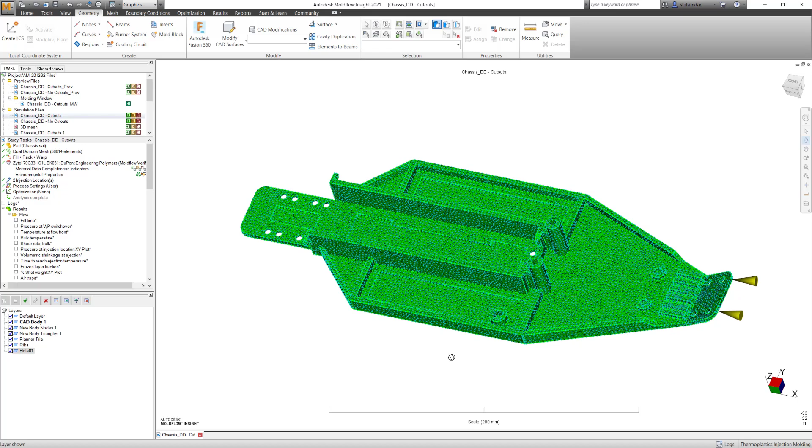In today's episode, I'm going to discuss improving the accuracy of your simulation results. I know there are a number of factors that contribute to increasing the accuracy of the results. A few are related to the CAD components and a few of them are related to the input data.

Now, what are the input data? It could be related to the processing parameters, it could be related to the mesh representation or how precisely you are representing the geometry to the solver, and another part is the material data input. Yes, you heard it correctly. Now, you ask me what material data input or what things can go wrong with the material data inputs. Well, we will discuss in a step-by-step manner or in a sequence.

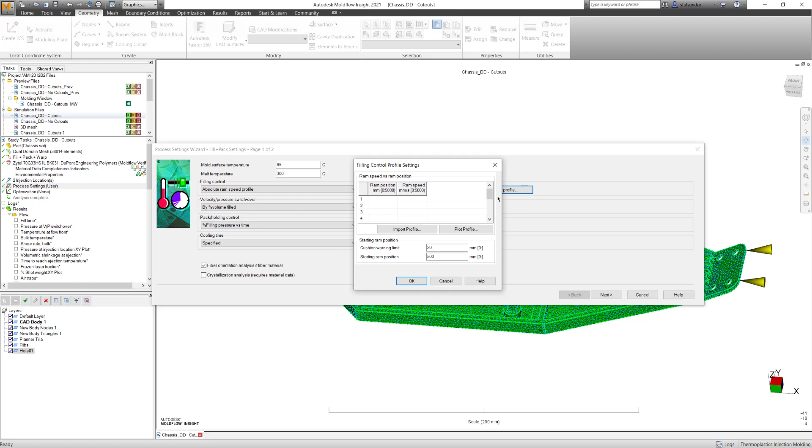First and foremost is the processing parameters. Moldflow does allow you to put in the processing parameters, for example in filling control. If you want to do correlations with your actual molding machines or take the data from the molding machines, you can fit in the data in terms of relative ram speed profile or absolute ram speed profile. That does take you closer to the actual reality.

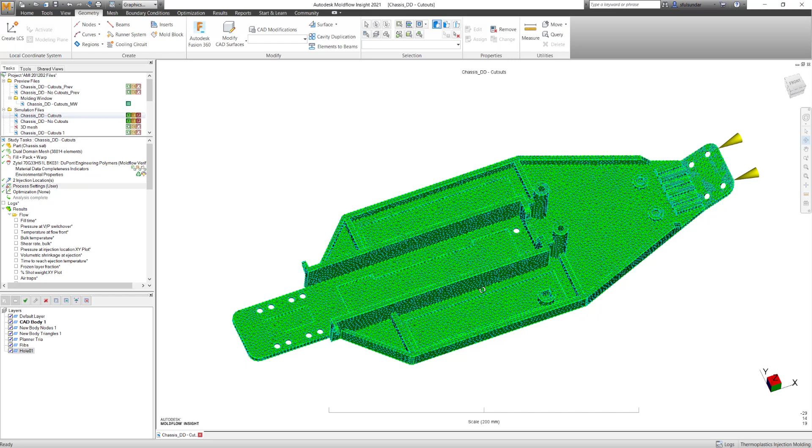Another input is related to how well we are representing the geometry to the solvers. Many times in the simulation or in the design house, the user is working on a little bit different geometry versus what has been cut into the actual tool. I have myself experienced some of these discrepancies between the two models. An example is related to the rib thicknesses. Maybe the rib thicknesses represented in the actual tool vary from the simulation model, and that can relate to issues like sink marks or short fill.

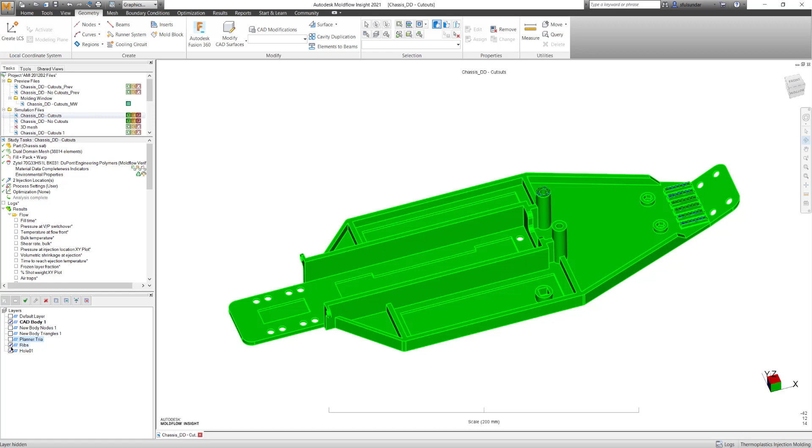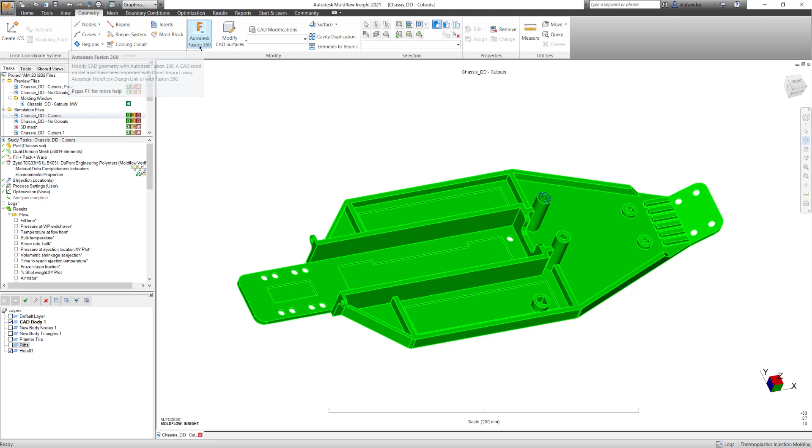Well, in that case, if you need to change the geometry on the fly, then Moldflow does allow you to make the modifications within the software with the help of normal or with the vector. You can review my earlier videos and check how these geometries can be updated on the fly. Or if you want to do detailed modifications, you can push this geometry to Fusion 360 while keeping your feed system intact, keeping your processing parameters intact, keeping your cooling channels intact, and you can push it back and restart the analysis.

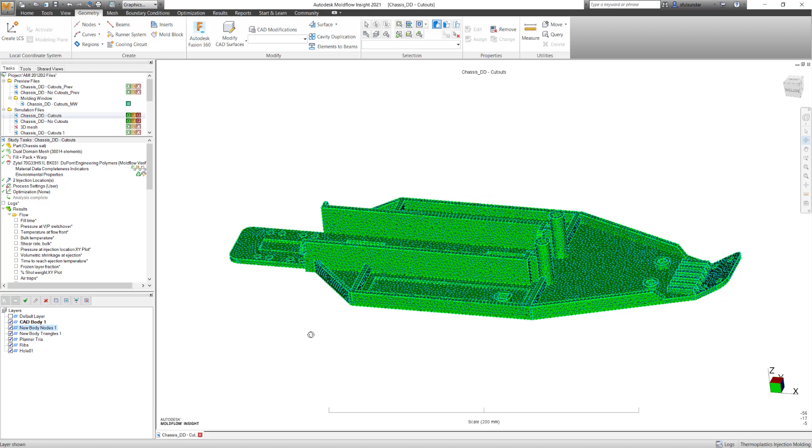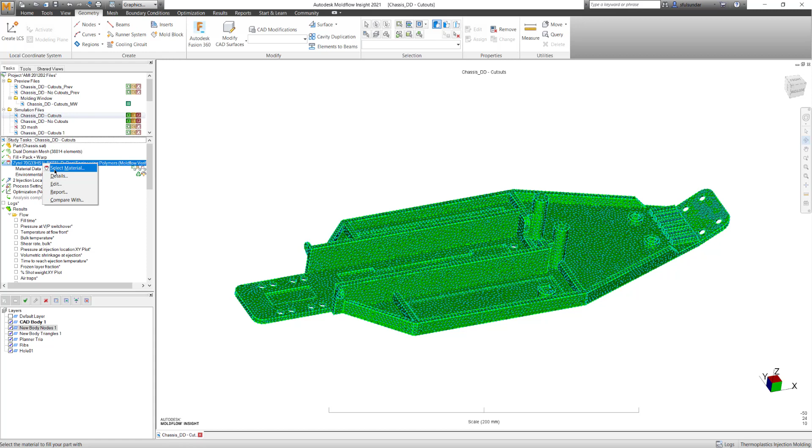And this was related to the inputs of the processing parameters and geometry representations. I did mention the material as well. Well, in materials, many times you get customized material database files from your resin manufacturer or your contract tool manufacturer, or it could be from the OEM as well. Having a UDB file is just not enough. Today I'm going to show you what things you should look into from the material point of view to increase the accuracy of your simulation results. I'm going to demonstrate this on the generic material UDB file.

Let's take an example of a generic ABS file here, and if you look into the details, it shows the information about the description, recommended processing, rheological properties. Everybody would have gone through it, but I'm going to talk about the completeness of this information. For example, in this UDB file, you would see some red text over here that shows that this is generic information. It's not related to the exact grade which has been tested. So next time when you see something marked red in your UDB file, it's not specific to that grade, but it's a generic property. The UDB file didn't have this specific information for completeness.

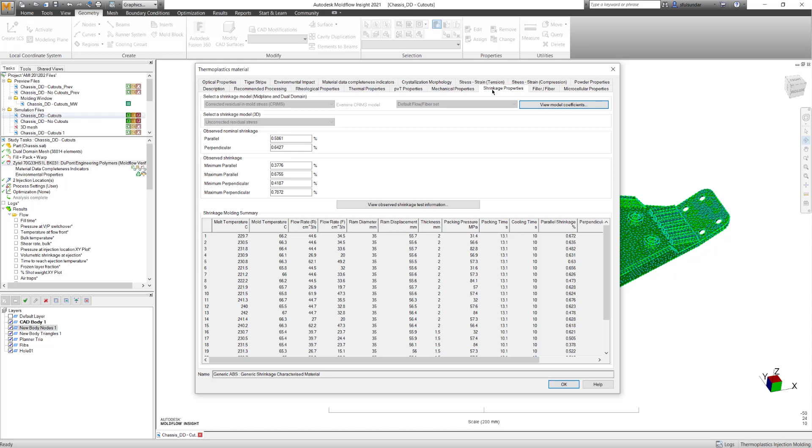Well, now the question arises, if this information is not complete, how is it going to impact my results? I'm going to talk a bit on that as well. Let's check the other properties as well, for example, mechanical properties. Now when you're doing a warpage analysis, if your UDB file doesn't have the shrinkage properties in it, probably 50% of UDB files may not have those shrinkage properties, but mechanical properties would be there. And if the mechanical properties are in red, that means it's generic. But in this case, it's not been highlighted in red. So it means it is very specific to this grade.

Now, these mechanical properties would be used in your warp analysis. And if you are doing a simulation using 3D, it's much more critical, as mechanical properties will be contributing to the accuracy of your warpage results. Now all these things I discussed will be represented in the form of material data completeness. Let's look at this tab. Now it shows that your filling data completeness indicator is gold.

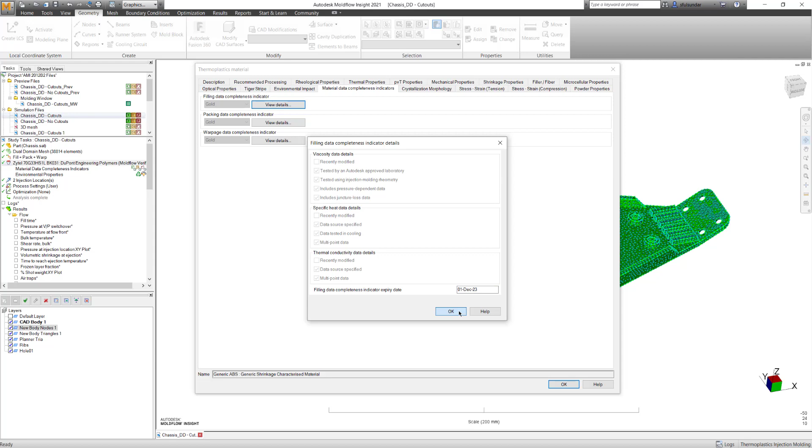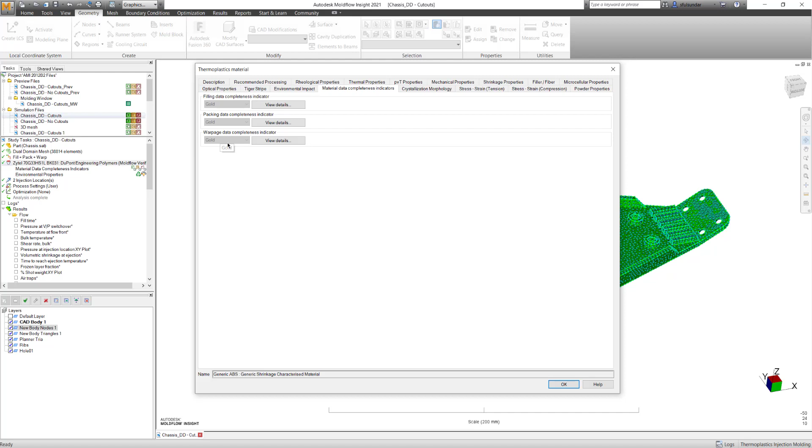It shows the information on when this was tested, and it also gives the information that this is going to expire at this date. It needs to be updated by the resin manufacturer prior to this date, or whoever has generated this information. To have a gold completeness indicator for warp, your fill and pack should also have the gold indicator. It cannot be that fill and pack is bronze or silver and the warp is gold. No, it goes in a sequential manner. First the fill, pack and warp. Gold stands for the highest completeness of the data.

If you need more information on this completeness indicator, just log into knowledge.autodesk.com and search for the help on Moldflow Insight, and in the search type material completeness indicator like I did here, and I'm going to check what information it gives us. Now this shows that the material completeness indicator investigates the quality of the data, for example, the fill data completeness indicator investigates the quality of the viscosity, specific heat, and thermal conductivity, because these are the basic things needed if you're running a fill analysis. And it also talks about gold, silver, and bronze, and of course unknown.

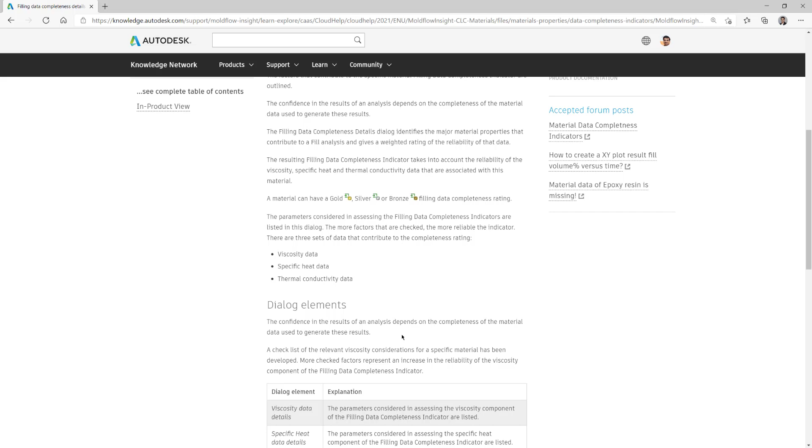So I definitely recommend you go through this web page and understand the criteria for completeness for each of these analysis types. For example, for fill we need to have viscosity data, specific heat data, and thermal conductivity data, and it also gets impacted by the way it has been analyzed, when it was analyzed, and the procedure used to do the analysis. So next time when you're doing the analysis, it's worth checking the material completeness indicators. This is surely going to impact the accuracy of your results. I hope this video was useful and it will help you in improving the accuracy of your simulation results.